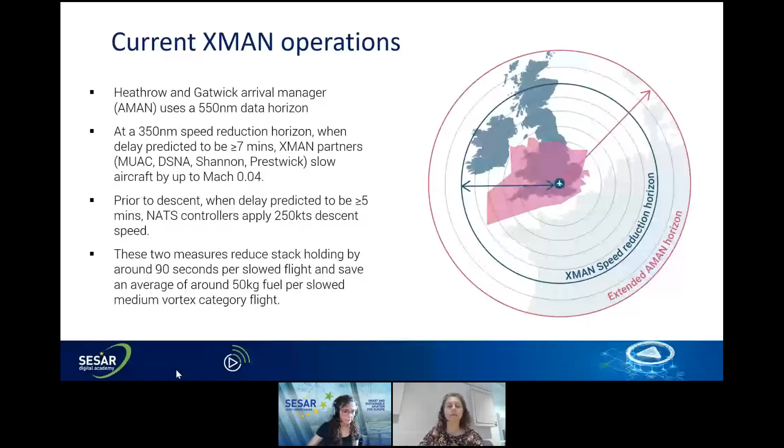In this SESAR project, we're now looking into how to improve arrival management even further, to achieve more efficiencies and debunch aircraft arriving into the airspace at the same time.

Under the current XMAN, controllers in NATS and our partner ANSPs apply a uniform speed reduction when a delay is predicted. Although this takes some time out of the holding stacks, it doesn't solve the problem of aircraft arriving in a bunch, as they would still have the same speed reduction applied. So a bunch of aircraft just turns up slightly later, but still close together.

Working with Frequentis Orthogon, NATS are looking to develop the AMAN so that, as well as absorbing delay, aircraft can be longitudinally separated prior to top of descent before they enter the systemised airspace structure.

With this streaming AMAN, rather than just passing a blanket speed reduction in cases where there's predicted delay, the aim is for aircraft which may not have sufficient longitudinal spacing for separation along a route to be assigned a time over a metering fix, or TOM, in order to facilitate a more steady stream of aircraft for the controllers to be able to apply optimised descent operations in the systemised route structure.

This time over metering fix will also allow for some delay absorption, but there may be a trade-off to achieve the desired spacing and facilitate continuous descents.

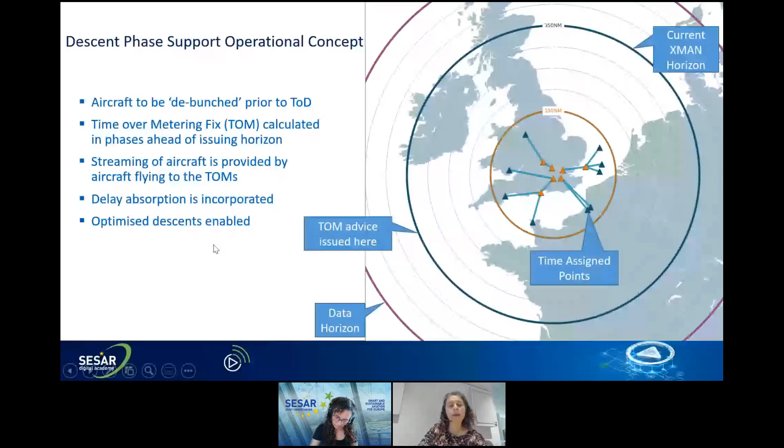Now, looking a bit closer in, as you can see in this diagram, the streaming AMAN not only assigns target times to the pre-descent waypoints, but also to the mid-descent merge points and to the initial approach fixes.

These time over metering fixes to the mid-descent merge points and initial approach fixes will be translated into descent speeds, to be passed by the controllers as proposed speed instructions.

In our current operations, controllers have to manage any such interactions through these merge points with tactical radar vectoring. With streaming through the merge points and to the initial approach fixes, aircraft will be able to fly optimised descents along the systemised airspace structure with little or no need for radar vectors or stepped descents.

This concept is expected to provide benefits not only in periods of high demand, but also when traffic levels are lower, as bunching will still occur in these circumstances.

There should no longer be a need to maintain a buffer of as much as 7 minutes of holding delay, but due to more precise information, time over metering fixes can be provided even when minimal delay is expected, whilst ensuring that the pressure on the runway is maintained.

So although some individual aircraft at the head of a bunch may not slow down as much in the cruise as they would with the current XMAN procedures, it's expected that more aircraft overall will have some delay absorption applied, resulting in a further reduction to stack holding in addition to the gains from current XMAN operations.

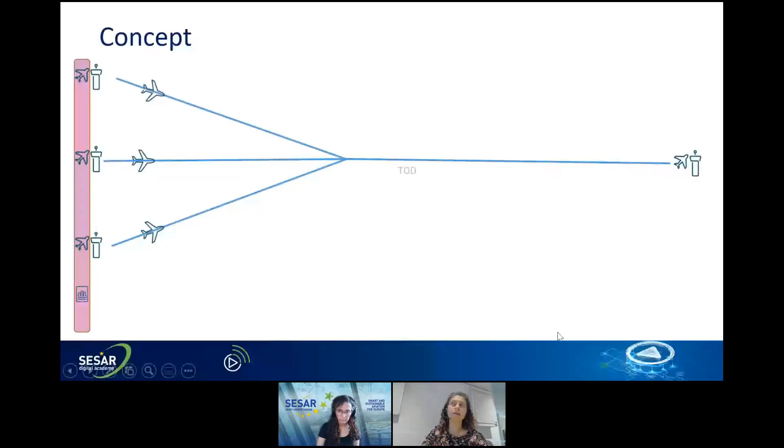In this example, the 3 aircraft are each predicted by the AMAN to arrive at the pre-descent merge point at around about the same time.

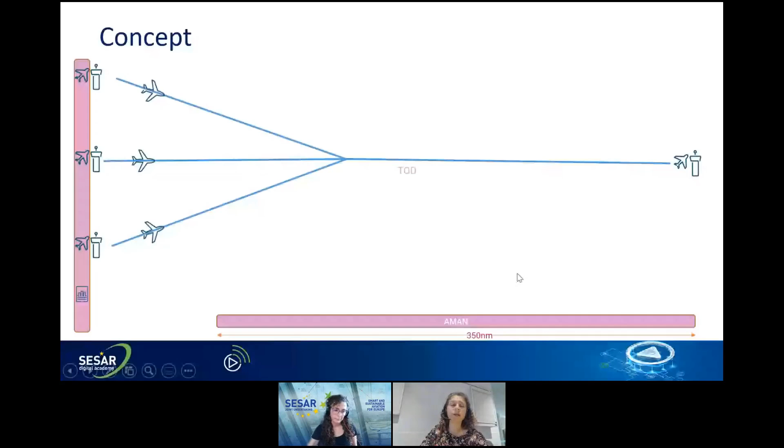So a time over metering fix will be applied to each of the aircraft. The pilots will fly to this time, meaning that they will arrive at this point separated by around 90 seconds each. That 90 seconds is a configurable amount within the AMAN though.

Therefore, they can go through the descent nicely streamed. The AMAN provides further speed refinement advice, which can be passed by the controller to ensure that they maintain positive separation over the aircraft, and can also ensure that any aircraft joining manage to merge with these aircraft.

It is expected that there'll still be some holding required. It won't eliminate the need for this completely.

We're hopeful that if the concept is successful, we'll be able to roll out the operation, not just to airfields with existing AMAN, but to those that may not have an AMAN at all.

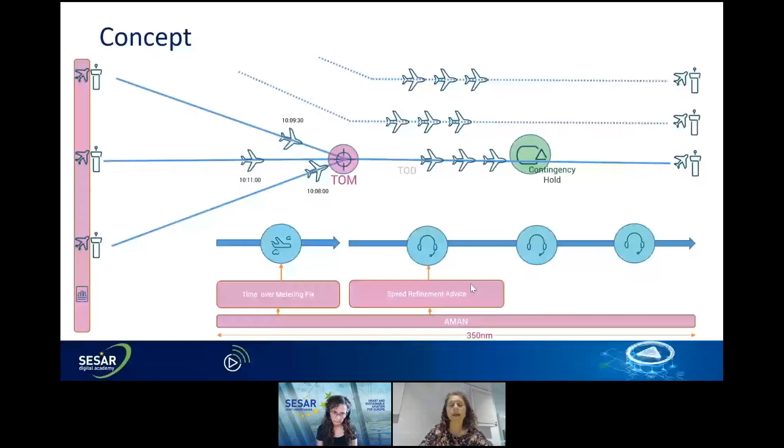And now for a further illustration, I've got a couple of videos to show you. In this first video, we're going to see what happens when no action is taken. The white diamonds represent the points that AMAN predicts the aircraft will be with no action taken, and there's a 2-minute lead vector shown on each flight.

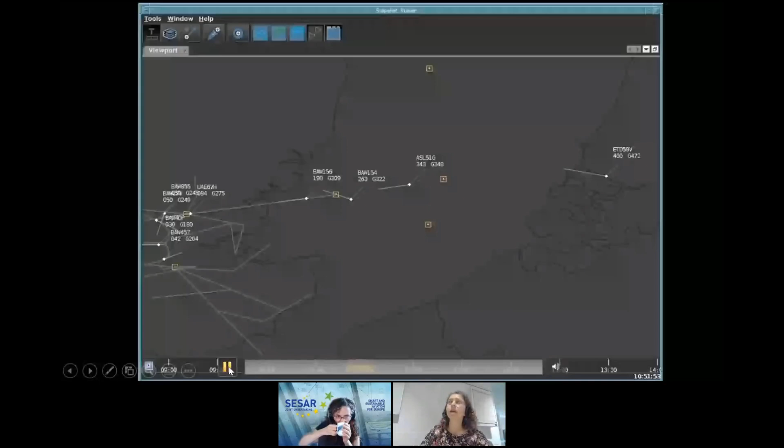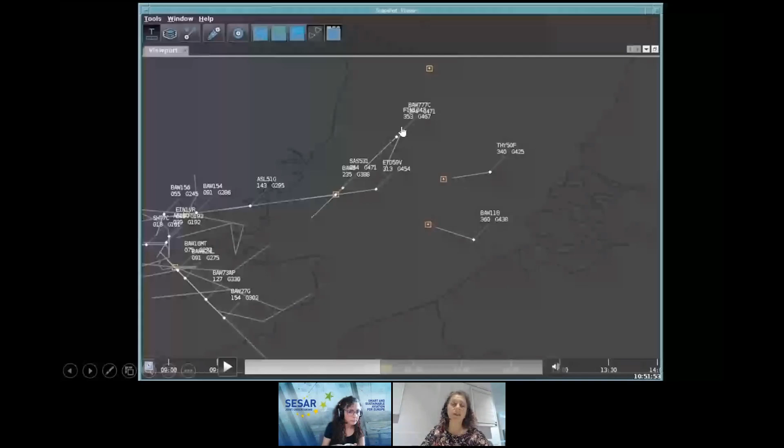As you can see, some of the aircraft arrived nicely streamed. Others, as we can see here, arrive closely together, which makes optimized descents very difficult without using radar vectoring.

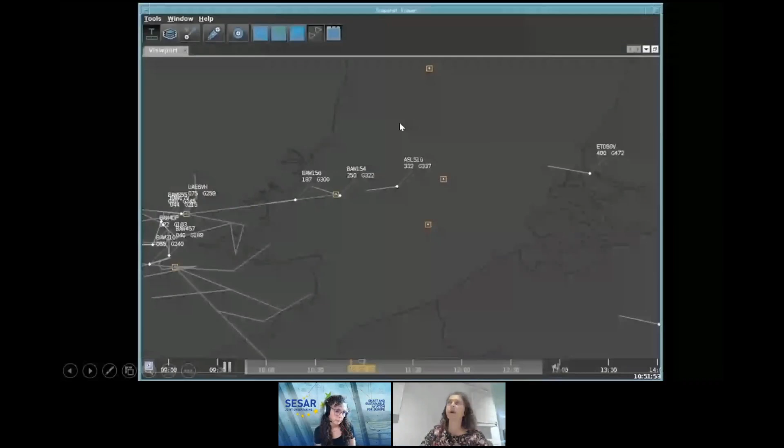In our next video, we're going to see what happens when AMAN takes some action. Again, the white diamonds represent the point where A-man predicts the aircraft will be with no action taken. Now we have a blue cone illustrated, and the point of the blue cone is where A-man wants the aircraft to arrive through those points.

As we see, we have some bunches of aircraft approaching, and I'll pause again just to point out: between here we have a Speedbird and a Scandinavian very close together. However, with the action of A-man, it brings the Speedbird forward slightly, so speeds up slightly, and the Scandinavian stays in around the same place, slightly further back, so that they're nicely streamed.

In this example up to the north, we have another Speedbird and a Finnair. In this case, the A-man is slowing the Finnair down very slightly to this point, and the Speedbird is being slowed down further so that it has a neat spacing behind it.

We can see that as the aircraft go through the descent, they're nicely spaced out. With the aircraft coming on the screen now, we can also see how some delay absorption is applied.

I'll pause again just to show this example of the Qatari here. There's no immediate aircraft around it, which means that no spacing would be required. However, the A-man is sending the Qatari a little bit further back so that some more delay is taken in the cruise and descent phases of flight rather than being spent in the holding stacks.

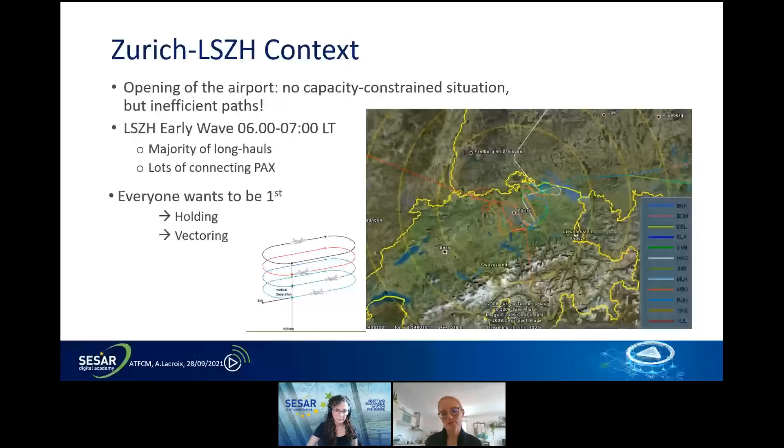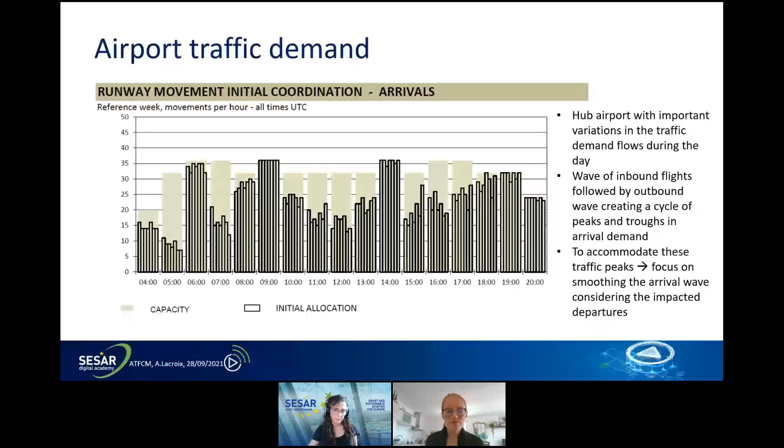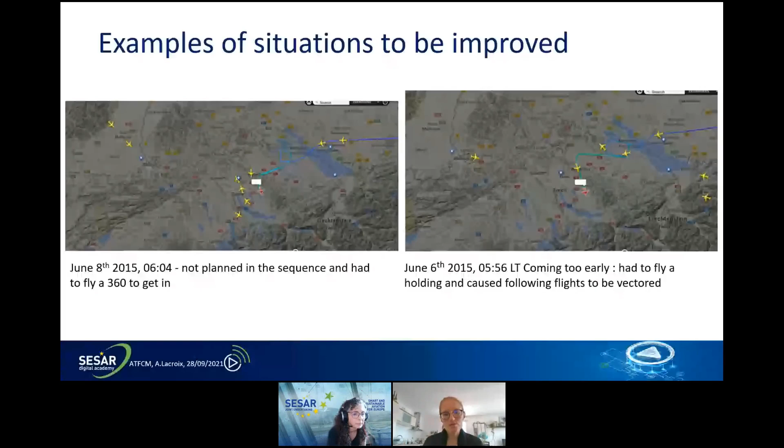So since approximately 2010, together with Swiss and Zurich Airport, we decided to closely coordinate to streamline these early arrivals. In 2014, the Green Wave project was created only for Swiss long-haul flights, in the time frame of the first half hour, so until 6:30.

What we observed is a very good adherence to the target time provided by the pilots, and the flights will arrive in the TMA already sequenced. That's why we wanted to increase the benefits of this procedure.

Afterwards, in 2018, the PJ25, also known as xStream, was launched, which enhanced this procedure by involving the network manager and using the new network manager B2B service called API for arrival planning information.

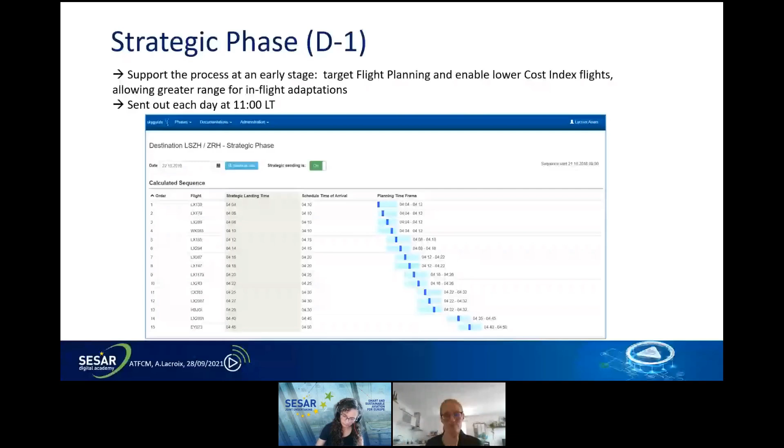Then the tactical phase happens on the day of operation. Once all the long-haul flights are airborne and have reached their top of climb, they send their revised and accurate estimated time of arrival at Zurich to their operational center, based on their actual takeoff time and flight time. Afterwards, the operational center transfers these estimates to SkyGuide, and SkyGuide retrieves all these estimates from the flights.

And in case we don't receive the estimates directly from the airlines, we take the times from the NM system, so from the ATFMS flight profile.

We compute the arrival sequence, and we send back this sequence with the ordering to all the operational centers involved, which is then transferred back to the flight crews as their TTOs. And then the crews manage their flight to meet their TTO at Zurich.

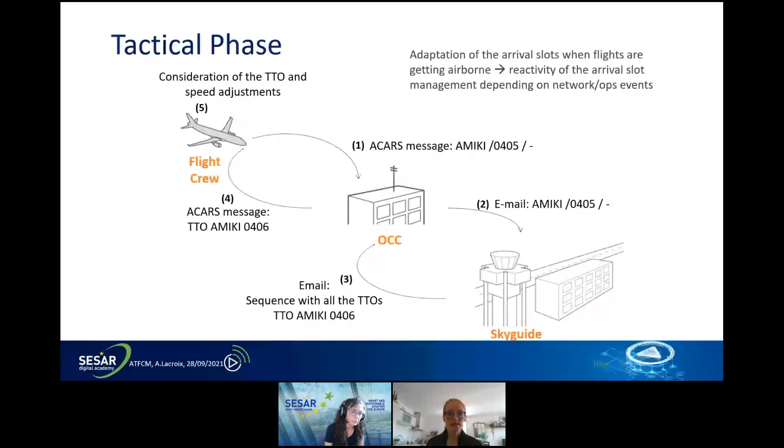So how does this tactical sequence look like? It's sent each day at 1:40 maximum local time, and it considers spacing of 2 minutes for each flight.

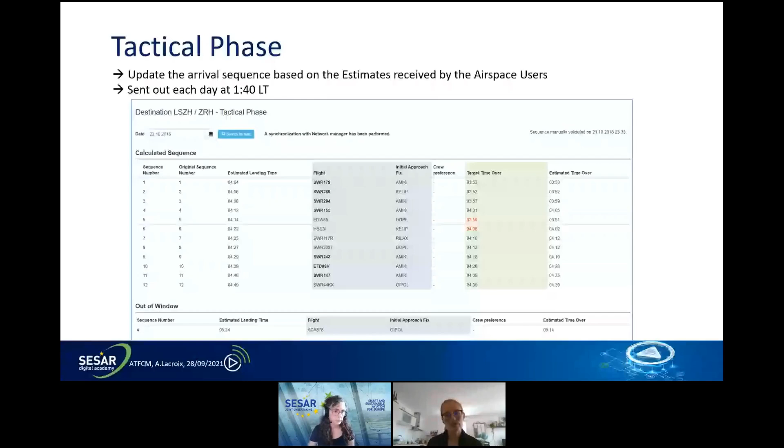So the SESAR trials have shown a significant reduction in track time and track distance in the Zurich TMA, as well as a significant reduction of the number of too-early arrivals, and therefore a reduction of the holdings.

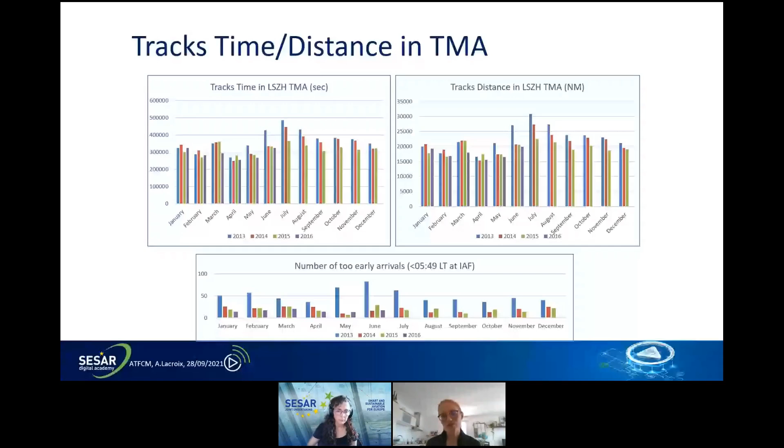However, from the eStream trials, some recommendations were highlighted. First, being that the NM estimates for the long hauls are not accurate, the ones taken from the ETFMS profile, because the trials demonstrated that these estimates diverge from the actual flown flight profiles and are not accurate enough to be reliable for the arrival sequence.

This is because the long-haul flights at that time are not yet in the ECAC area, so the NM system hasn't received the position report yet directly from the aircraft. So it relies only on the flight plan, and the trial showed that the TTOs were not achievable by the crews if we take them from this ETFMS profile.

Another recommendation which came out of eStream is that we have a majority of long-haul flights during this first hour. We still have 2 or 3 short-haul flights, and we need to integrate them to have whole flow considerations. And for that, we needed to integrate the network manager into the process.

And that's where the PJ25, also known as Xstream, came from, which was a very large-scale demonstration. We had 3 different exercises within this project, and one of them was directly a follow-up of the eStream project, targeting the enhancement of this eStream procedure by involving the network manager and using this new B2B service, the arrival planning information, enabling the ANSP to send a target time of arrival to the network manager.

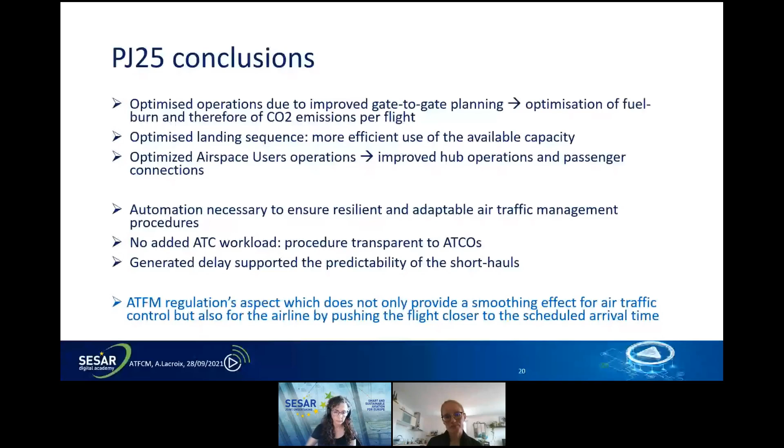So this project enables us to go towards performant and sustainable environmental operations. The benefits are for all: airspace user, ATC, and the airport. We improve the flow prediction in the TMA and the terminal sectors, thanks to a better anticipation and a more efficient coordination between all of us.

The improvements led to higher punctuality and on-time performance, taking some volatility and some buffer times away from the systems. The ATC work was facilitated. We made better usage of the available capacity. We reduced the tactical intervention.

And as we cherry-pick shorter flights to streamline the whole flow, maybe we can talk about a green ATC delay, because we saw that delays are created, but with environmental benefits.

Here we saw that regulations are not only for capacity-constrained situations, but they show as well their potentiality to smooth out the peaks and gaps in the demand, and it's a useful mechanism to push the flight closer to their scheduled time. So maybe in the future we can consider and apprehend the regulation and the delay not only as a means to resolve safely a capacity-constrained situation, but as well as a means for the ANSP to allow green and environmental flows.

PJ25 also provided improvements in terms of environmental sustainability of air traffic by reducing the holdings, the vectorings, reducing the fuel consumption, CO2 and noise emissions, and reducing the aircraft noise impact. Improving the air quality is and will remain a priority in the vicinity of airports.

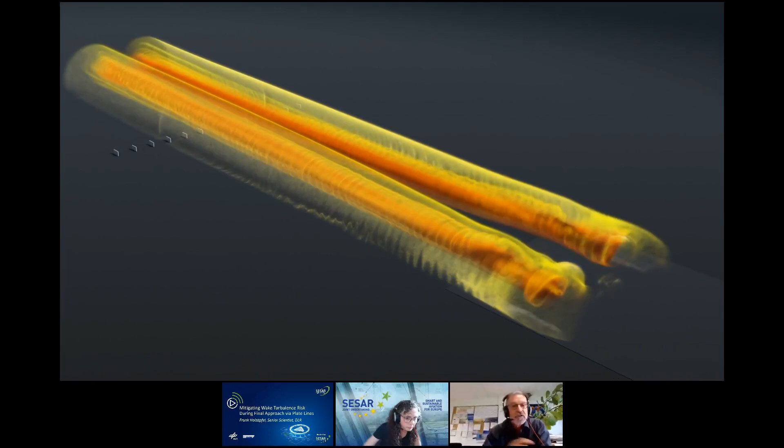As an introduction, I would like to share a video showing the numerical simulation of the A340 aircraft in high lift configuration doing final approach and landing on a runway equipped with a series of plates that you see on the upper left, which we call a plate line. In this animation, velocities are color-coded: high velocities in red, intermediate in yellow, low velocities in white. As you can see in a few seconds, the high velocities in the area where the vortex cores are will first reduce over these plates, and then disturbances will propagate to both sides, with the effect that all along the stretch where a following aircraft might land, the vortices would be less strong than they would be without those plates.

Now I have to continue with my talk, which should be here. Yeah, that's correct. So, why plate lines?

As many of you may be aware, wake vortices pose a potential risk to follower aircraft, and that's why in the 70s, minimum separation distances were introduced after the introduction of the B747 aircraft, which limit the capacity of big and busy airports. But maybe only a few of you are aware that the highest risk to encounter wake vortices prevails in ground proximity. So with the plates, we want to widen the bottleneck posed by this flight phase in terms of wake vortex risk and capacity.

So during flight at higher altitudes, the wake vortices induce each other a descent speed such that they would descend below the flight path of a following aircraft. This, of course, is not the case close to the ground. This situation is shown here with these four photos on the right, where we see a numerical simulation of the vortices in an end view with a crosswind from the left. So when these vortices approach the ground, they will first diverge, but they produce a vorticity layer close to the ground, which will detach at a certain time, rotate around the primary vortices, which leads to some vortex rebound, and then interact with these vortices, which leads to their decay.

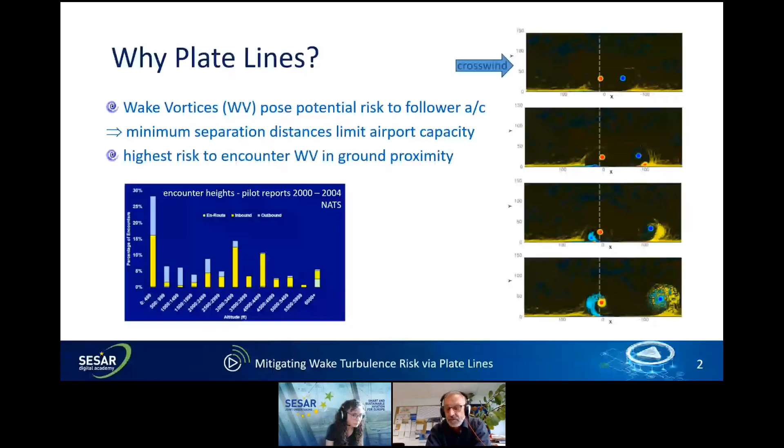These are pilot reports of wake vortex encounters collected during the years 2000 to 2004 by NATS. So it's essentially London Heathrow traffic. And you can immediately see that the highest risk to encounter wake vortices prevails for inbound traffic in the lowest height range, extending from the ground up to 500 feet above ground.

Now let's talk about the concept of the plate lines. As you can see in the photo right below, taken at our experiment that took place at Vienna Airport, the plate line consists of several upright plates which are installed underneath a glide path. We think this is a passive, economic, robust, and safe method to accelerate wake vortex decay.

The physical mechanism hiding behind that is shown on the upper left. So once the wake vortex approaches the ground, it will induce secondary vorticity, but at the plates, it will much more rapidly induce a so-called omega-shaped secondary vortex, which will actively approach the primary vortex. It is then wrapped around the primary vortex, and both spiral-shaped rings induce themselves a propagation speed to the left and the right, which will cause premature wake vortex decay.

So what are the benefits? We will have accelerated wake vortex decay, of course, less wake encounters leading to less go-arounds, so in general, some increased safety level. The next bullet point needs a little bit more explanation. So we think the plates may also help to compensate increased encounter risks brought along by runway capacity enhancing methods, like for example, RECAT-EU pairwise separations. So what's RECAT-EU?

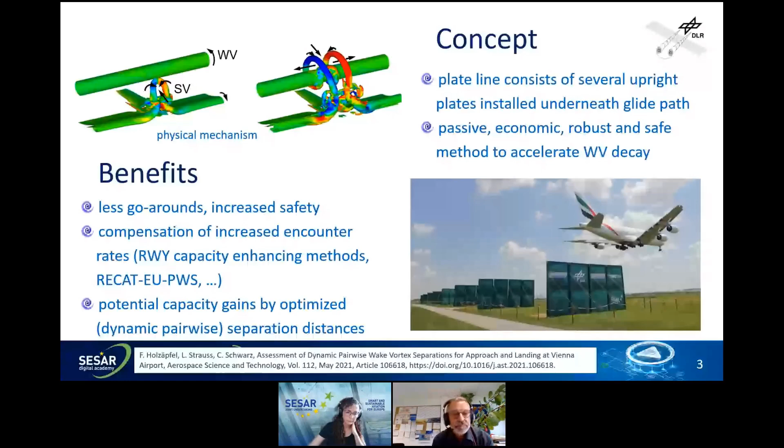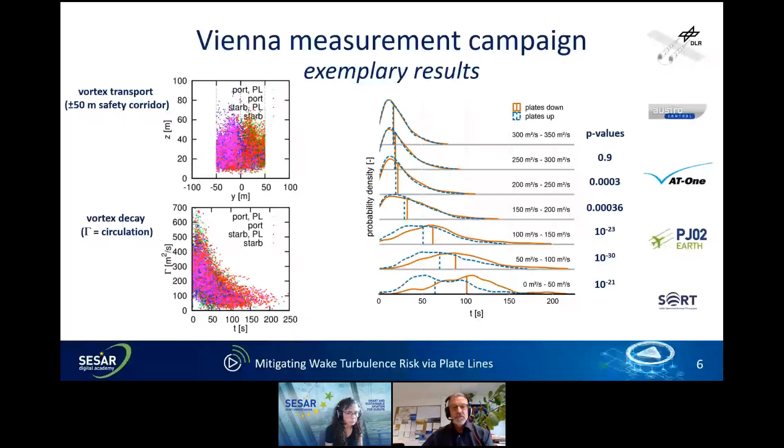One example of that is shown here on the right, where you see so-called probability density distributions of wake vortex lifetime for different ranges of vortex strengths, of circulation strengths. The curves with plates down are orange, those with plates up are in blue. You see while the vortices are strong, these distributions are more or less identical, but with progressing vortex decay, they deviate more and more from each other. In the lowest circulation range, the average lifetime of the vortices is reduced by the plates from 100 to 70 seconds.

The first one would be that the lifetime reduction potential achieved with the plates is about similar to that occurs in a high turbulence regime. For this, it's important to understand that turbulence really accelerates vortex decay such that wake encounters would be very rare. So we achieve qualitatively something similar to that.

We also found that a single plate line is almost as effective as 2 lines. So when we are going for permanent installation of the plates, we will install only a single plate, which would typically be situated directly in front of the localizer.

Then we found that lifetime reductions increase with aircraft size, from 22% for an A320 to 37% for bigger aircraft like a B777. Finally, we found a 50% circulation reduction for heavy aircraft, assuming a 120-second separation to following medium-type aircraft.

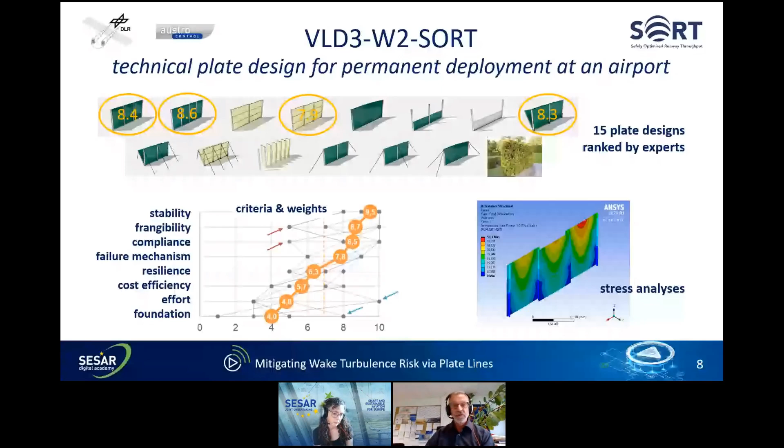The result of this selection process with the help of the experts is shown here. This plate would consist of 4 frangible aluminum masts covered by 9 honeycomb composite panels. Currently, we are in a phase to get approval from Austrian authorities for the installation of a plate line or a plate prototype at Vienna Airport.

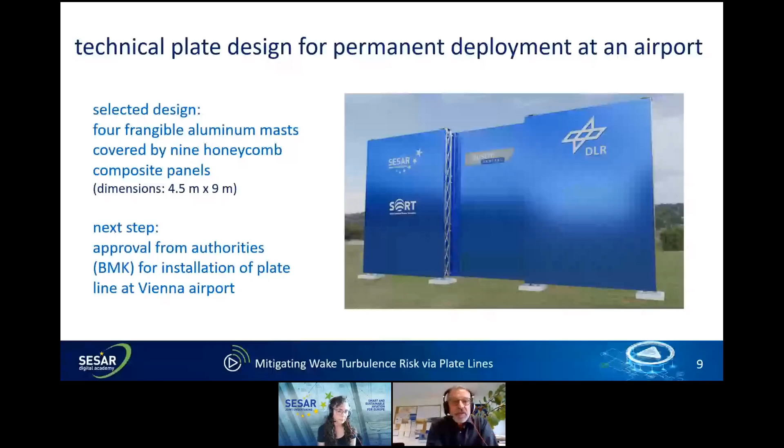Then we also had a look at the separation reduction potential compared to RECAT-EU and RECAT-EU pairwise, also by applying this method. So what does RECAT-EU do to really define their separations? They are considering so-called reasonable worst case situations where the vortices would remain in the flight path and live very long.

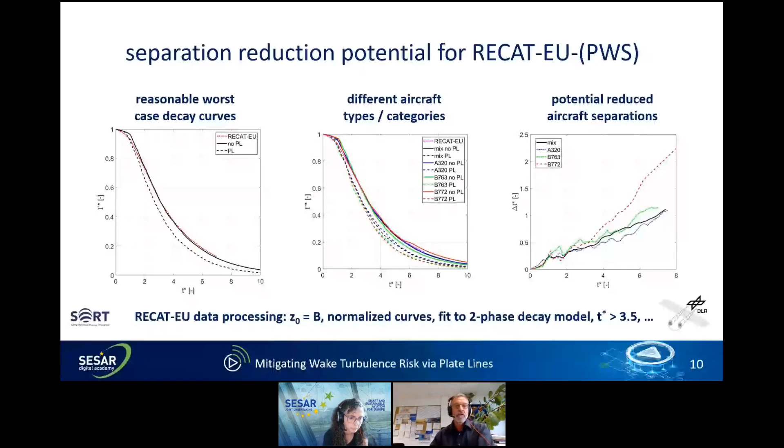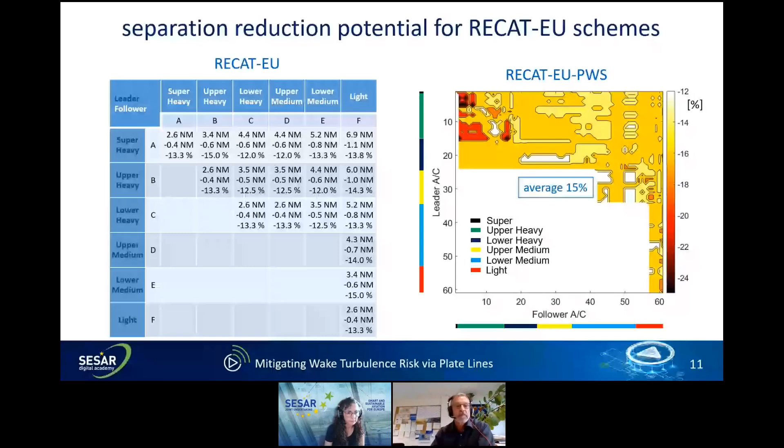This brings me to the conclusions and outlook. I hope I could convince you that we're doing some smart exploitation of vortex dynamics, enabling the passive, cost-effective, robust, and safe plate line method. Installation of plate lines reduces wake vortex lifetime, depending on aircraft size, by 22 to 37%, bringing improved safety levels, resilience, and fuel efficiency by avoiding go-arounds.

The separation reduction potential for RECAT EU or RECAT EU pairwise separation schemes varies between 12 and 24%, but is mainly around 15%. We think a near-term goal could be to install plates together with the introduction of RECAT EU pairwise separations, to compensate for encounter risks brought along with such solutions, and possibly with other solutions aiming at increasing runway capacity, like reduced runway occupancy time or reduced minimum radar separations and time-based separations.

We're hoping that not too far in the future, we will be able to install a permanent plate line, possibly at Vienna Airport, and then conduct dedicated wake vortex measurements again to enable, in the longer term, dynamic pairwise separations. More generally, this approach would help for more efficient use of airport capacity, which contributes to climate and environment-friendly aviation by avoiding delays and holding patterns, and may also postpone building new runways.